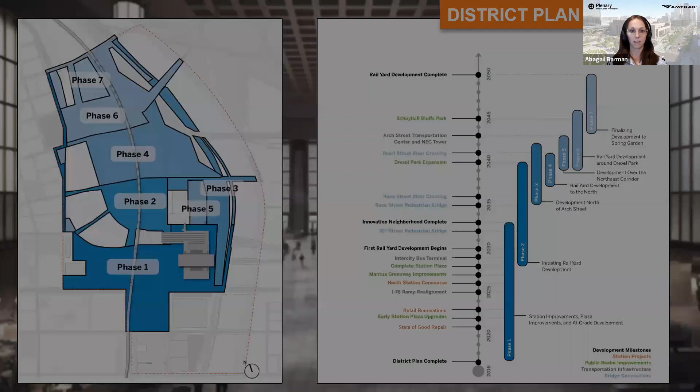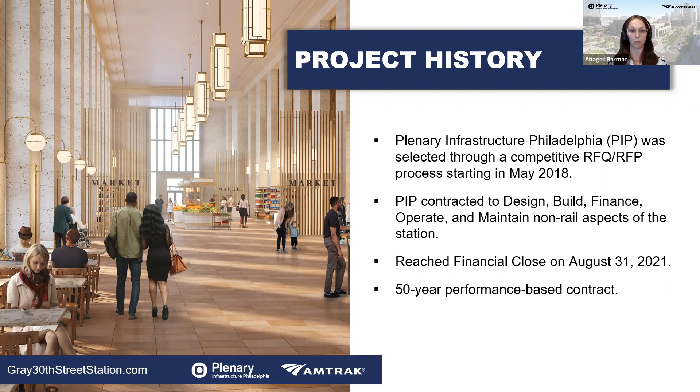To implement that first phase, we went through an RFQ, RFP process that started in 2018, which has gotten us here today with PIP. We have a lease with PIP, Plenary Infrastructure Philadelphia, to design, build, finance, operate, and maintain all non-rail aspects of the station over the next 50 years. We just reached financial close as of August 31st this year, and we now have a 50-year performance-based contract with PIP to redevelop the station.

With that brief history from 2013 to today and how we've gotten here through the district plan, I'll turn it over to the stars of the show tonight, PIP.

Hey, thanks, Abagail. I'm Jeffrey Fullerton. I am the project director for Plenary Infrastructure Philadelphia and senior vice president with Plenary, and really happy to be here tonight. We are thrilled that Amtrak picked us through a competitive process to be the lead developer for the station, and I'm excited to embark on a 50-year journey and contract.

I'm going to tell you a little bit about what is involved with the project here, and then we'll dive into some more details. As Abagail mentioned, there's a need to modernize and preserve the station. Those of you from Philadelphia will recall you've just had the facade renovated and refurbished. Similarly, we're looking to do that now inside the station, including a lot of the equipment and systems that have some deferred maintenance associated with them.

We're also really looking to enhance the customer experience, the customer-facing elements, the operations where you get your tickets, where you drop off your bags, really improve the rider's experience. And then revive it as a historic station, but also bring in some modern twists, improve the retail operations and amenities there as we restore the historic fabric of the station.

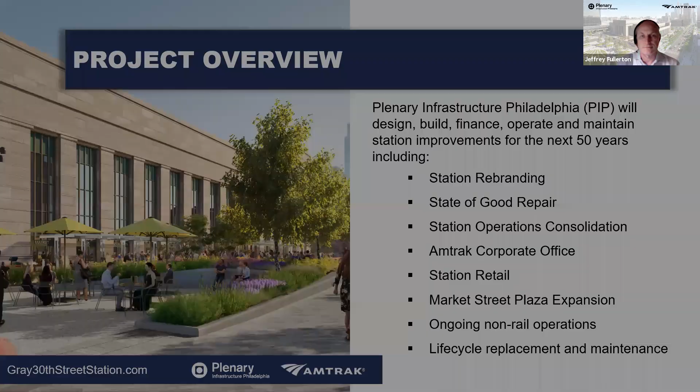And with that, I'll turn it over to Cody at SOM to go through a few of those elements in a little more detail and show you some pretty pictures.

Thanks, Jeff. Good evening. My name is Cody Stadler, an architect and the project manager from the architecture firm Skidmore, Owings and Merrill. I will walk you through the design intent and architectural interventions planned for the William H. Gray III 30th Street Station.

The components of this renovation, as Jeff so eloquently put, are the station retail renovation, Market Street Plaza expansion, corporate office renovations, station facilities and back of house operations consolidation, Metropolitan Lounge, and a signage, wayfinding, and branding program.

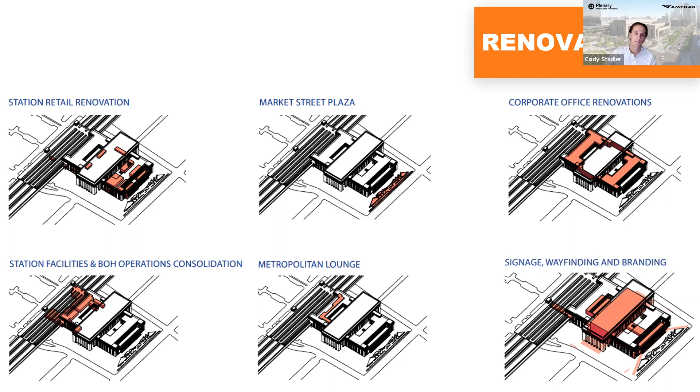Regarding the station operations and improved passenger experience component, overall, the design intent for the renovation of this station is to provide a pleasant and clearly navigable space for Amtrak's users and the general public.

The design interventions in this space range from restoring the grandeur of the historic main concourse, refreshing the Metropolitan Lounge, reconfiguring baggage claim, and an overall modification of user flow and traffic patterns in anticipation of an increase in ridership. The passenger experience of the station will be improved through relocating waiting areas, providing clearly designated information and assistance zones.

Through the placement of well-crafted pavilions. These new interventions will defer to the historic fabric of the station while providing visibility to their important functions. Additionally, while under construction, the station will remain continuously operational.

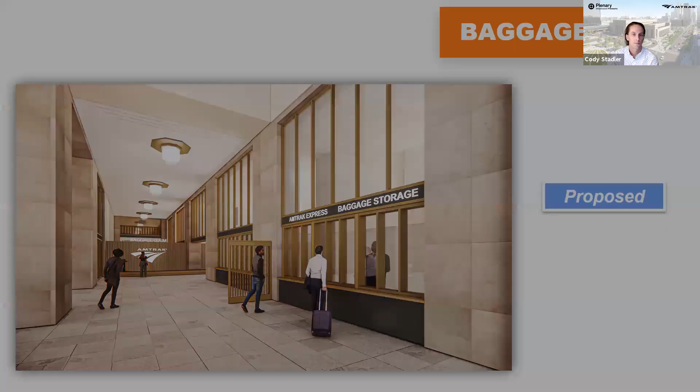Next, we have our first survey of the evening. We have 2 survey questions for you to answer with regard to passenger experience. We're interested in hearing your feedback on the following question first: While waiting at the station for your train, which of the following is most important? Comfortable seating that is near the track entrances, highly visible information and service kiosks, visually appealing and well-lit interior spaces, or new architectural pieces that do not distract from the beauty of the station.

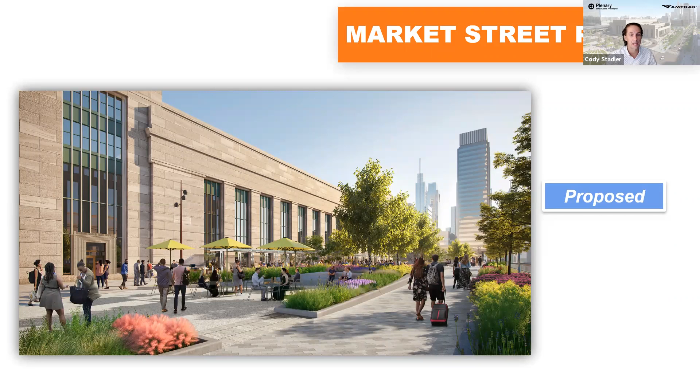In this rendering, you can see our proposed design solution. We propose that Little Market Street be closed off in favor of a pedestrian-friendly space that is safe and full of planted areas for people visiting the station.

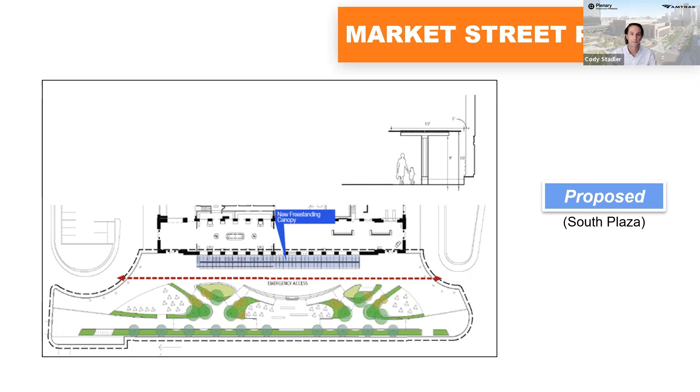From this rendering, you can see our design intent of hosting a market space underneath a minimal canopy adjacent to the South Concourse retail. This zone will help transition retail functions from the inside of the station to the exterior and will help create a front door experience for the station.

We have two more survey questions for you to answer. We're interested in hearing your feedback on the following question first: what would you prefer for a public plaza? A variety of open and covered spaces, a mix of planted and paved surfaces, overhead cover outside of the station entrances, and seating arrangements for a variety of sizes or groups.

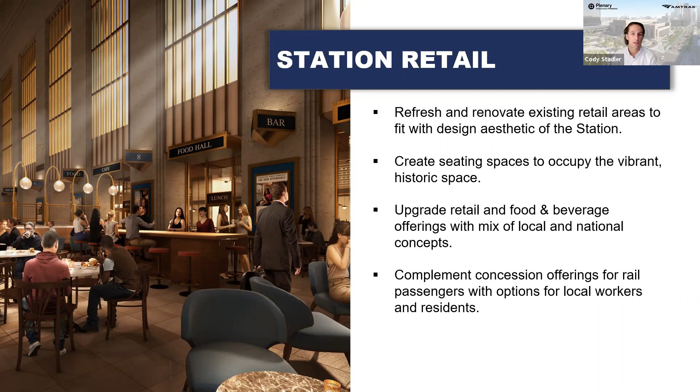The next component of the station space renovation is the station retail. The balance of these station renovations is in the retail areas throughout the public space. Our intent is to refresh and renovate these spaces to fit with the historic design aesthetic of the station itself. We are designing these spaces with seating that occupies the historic and vibrant areas of the station so that more people can enjoy this wonderful and beautiful space. Furthermore, there will be upgraded retail and food and beverage offerings for rail passengers with options for the general public as well.

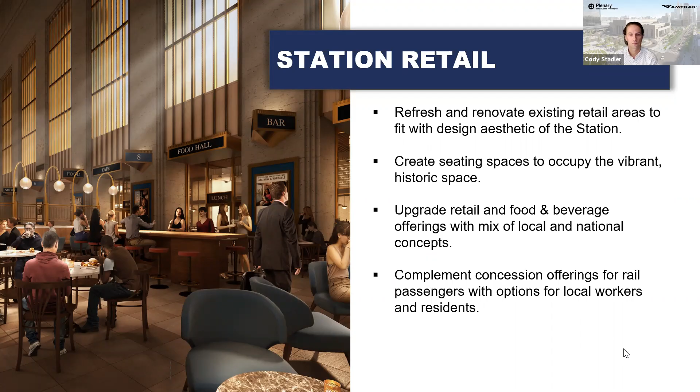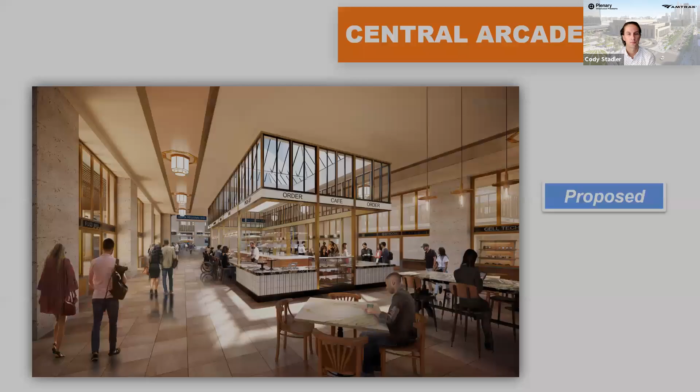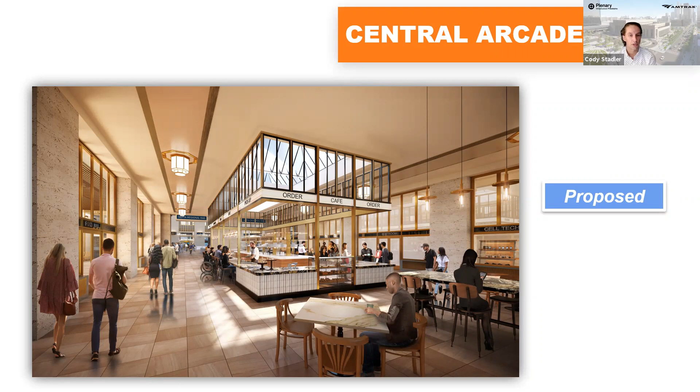Our proposed design intent is to consolidate these spaces into a more centrally located space with perimeter seating. A restoration of historic storefronts surrounding this space will help restore it to its historic grandeur, as well as augmenting that historic nature with new interjections of design.

Next is the main concourse. This space is probably the least occupied space of the station with regard to retail. Currently, it's devoid of the buzz and vibrant nature of the retail spaces that are adjacent to it.

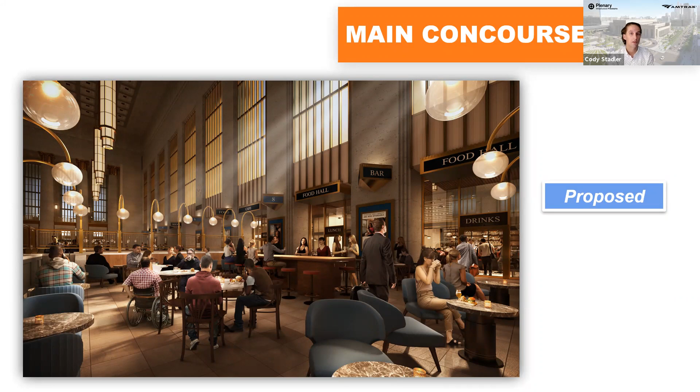With the infusion of seating areas for food and beverage spaces in the main concourse, this space will become enlivened and full of life. By putting programmed seating spaces in the main concourse, it will give the space a burst of energy that it currently does not contain.

And one survey question now with regard to the station spaces. We're interested in hearing your feedback on which of the following qualities of space would improve your experience of the main concourse level: a restored historic fabric, clear wayfinding and signage, modern and comfortable seating options, and crisp architectural details.

All right, it looks like there's a high priority on restored historic fabric and modern and comfortable seating options. And thank you for that feedback. We're honored to be working in this space, and those are definitely components of this project that we are carefully considering as we move forward.

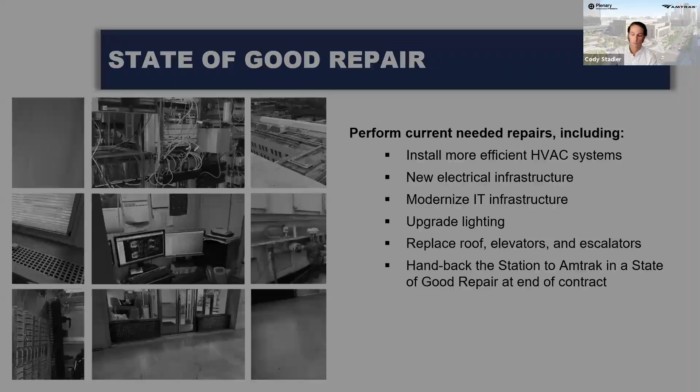And finally, the station will undergo a series of state of good repair renovations to bring systems and building infrastructure up to current standards and back to operational efficiency. Included in this list of items are more efficient HVAC systems, new electrical infrastructure, a modern IT infrastructure, upgraded and refurbished lighting, roof replacement, as well as replacement of escalators and elevators. At the end of the 50-year contract, the intent is to hand this station back to Amtrak in this state of good repair.

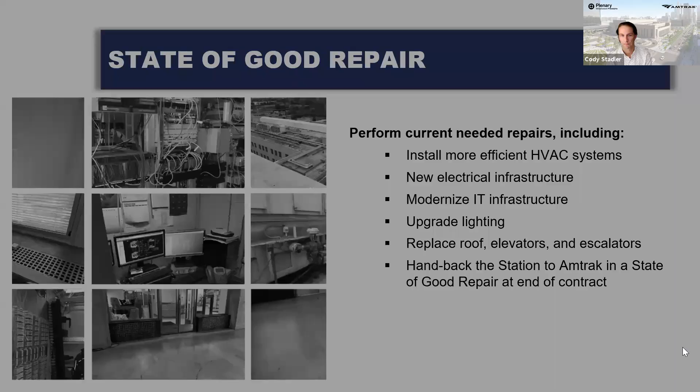Thank you, Cody. My name is Jennie Gwin. I'm an architect and principal with Beyer Blinder Belle Architects, and we're privileged to serve as the historic preservation architect on this project. The station is listed on the National Register of Historic Places as well as the Philadelphia Register.

The station is significant in the context of urban planning as a monumental rail station constructed by the Pennsylvania Railroad that transformed urban Philadelphia. The station is also significant in the context of architectural design for its association with the architectural firm Graham, Anderson, Probst, and White, whose neoclassical design reflects a more simplified and contemporary classicism with the use of Art Deco and Art Moderne elements.

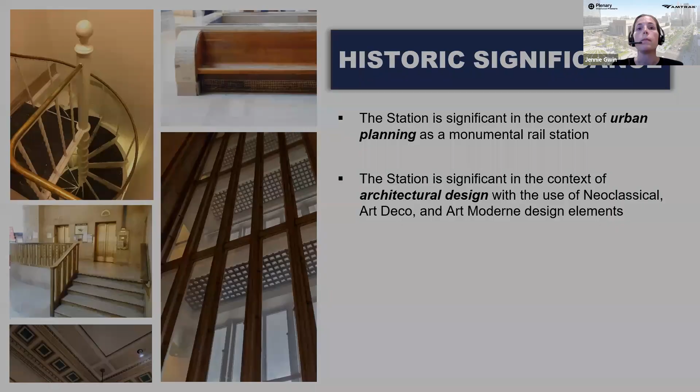Our approach to historic fabric will be carefully considered and aligned with the Secretary of the Interior standards for rehabilitation. All interventions in the historic areas will be reversible per the Secretary of the Interior standards and will be purposely differentiated from the historic massing and material of the existing historic fabric. All new elements will be designed to highlight and not obscure character defining features, such as some of the features that you see here in the main waiting room.

Thank you. You see here a list of the key items that will be restored, which includes the finishes, the travertine and plaster that you see here in this photo, as well as bronze doors, lighting, and wood benches. There's also two features that I'm sure many of you think of when you think of the historic character of the station, and that is the Spirit of Transportation bas-relief in the North Waiting Room and the Pennsylvania Railroad War Memorial, both of which will be retained and restored as part of this project.

Thank you, Jennie, for that. My name is Ianni Vardouniotis. I'm a senior project manager at the Gilbane Building Company.

Gilbane is one of the oldest continuously operating family-owned businesses in the United States. In fact, we just celebrated our 150th anniversary in business. Gilbane is recognized as one of the premier general contractors in the United States. Locally here in Philadelphia, Gilbane was ranked top 10 local contractor in 2020 by the Philadelphia Business Journal, as well as winner of the 2020 Excellence in Safety Award of the Philadelphia General Building Contractors Association. The Gilbane Philadelphia Business Unit has been building Philadelphia for more than 35 years.

A few local projects: we just recently completed the Live Casino and Hotel at the Stadium District, as well as the Northeast Community Propel Academy, a K-8 school, which was also a very successful P3 project.

PIP has developed a phased approach to the construction to minimize impacts to the customer experience and allow Amtrak to maintain train operations. There are 6 major phases of construction outlined in the slide, with the corporate office, state of good repair, station retail, Market Street Plaza, station operations, and the Metropolitan Lounge.

Many of these activities will occur concurrently. However, each major activity will be further broken down into smaller ones to again preserve the customer experience and minimize impacts. We are currently at a 40% design package, marching towards 100%, with an anticipated completion date of early spring 2022. Gilbane will mobilize in late spring of 2022 to begin construction activities, targeting a substantial completion date in the winter of 2025.

Good evening, my name is Mike Golden. I work for Vantage Airport Group. I am a commercial director for the company and the project manager for Vantage on this project.

I want to introduce Vantage Airport Group, and I'll talk a little bit about our plans for the station. Vantage owns, operates, and consults on transit facilities throughout the world. We have been involved in over 30 facilities throughout the world, including LaGuardia Terminal B, where we run the development, and Chicago Midway Airport, where we run the concession program. We will be responsible for the retail, food and beverage program at the station, and services such as the car rental counters.

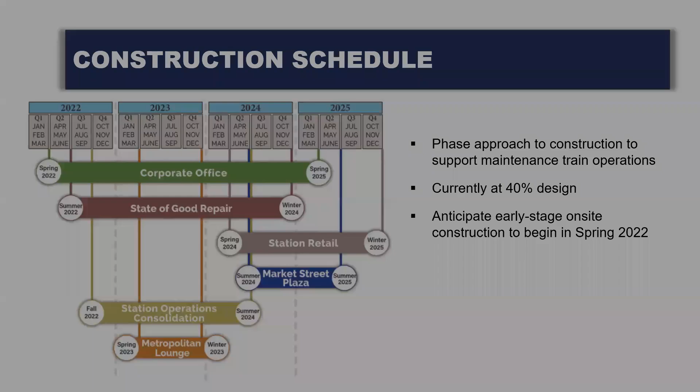Great, thank you. And to that point, if I can go back to the slide that shows the schedule, each of those packages will be released prior to those phases. So you can see on your screen, construction will be starting in spring and wrapping up in winter 2025, throughout that entire process.

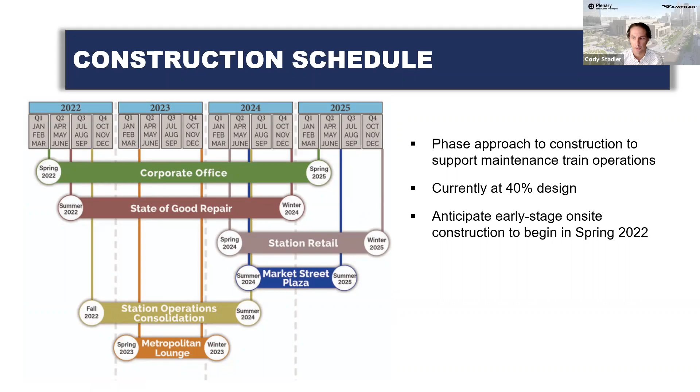The next question is, if benches in the main hall are decreased and moved to the north waiting room, will there be access to the tracks from the waiting room? Cody, could you respond? Sure. The move of some of the benches from the main concourse to the waiting room really is a result of blending that retail and passenger experience into the main concourse. Access to the tracks from the north waiting room will remain largely the way it is right now. We're not changing the entry or escalators down to the track level, so it will remain the way it is.

But there will be adequate wayfinding and signage to easily navigate to your desired track. Thank you, Cody. Maybe just to clarify for people, the historic benches built into part of the stairs and escalators that go down will remain in the main waiting room. So there will still be historic benches, just some of the freestanding ones are being relocated. Yes, thanks for the clarity.

Our next question is, are you coordinating with surrounding developers, especially Brandywine? The possibility for coordination of this plan with the growing business district and neighborhood around it is strong and a great opportunity for comprehensive development of this area of the city. Gail, can you respond? Yeah, certainly. That coordination is sort of the vision behind the district plan. Brandywine is one of the principals, as well as Drexel, SEPTA, and PennDOT. We are all trying to coordinate our efforts and work together to look at the area surrounding the 30th Street Station as a full district. So we are certainly being mindful of our partners in the area and the larger community and coordinating as much as possible. Thank you, Gail.